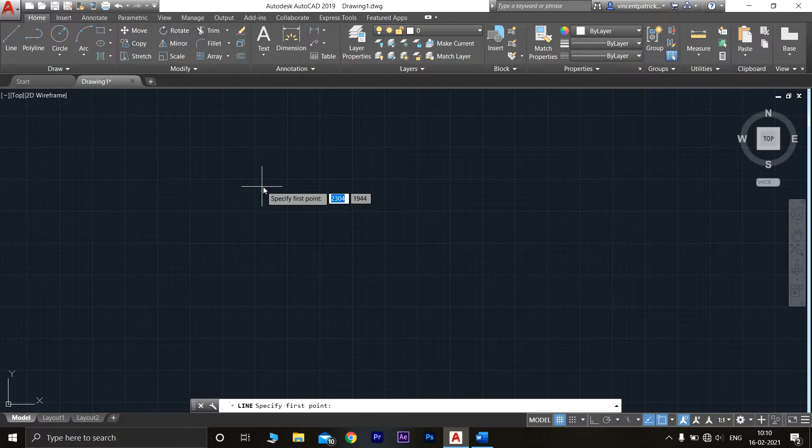Now first let's draw the front view. The front view will be from A to B and C. This section will be the front view, so let's draw it. Go to line, length of 40. So 40. And next this is also 40, so again draw one line for 40.

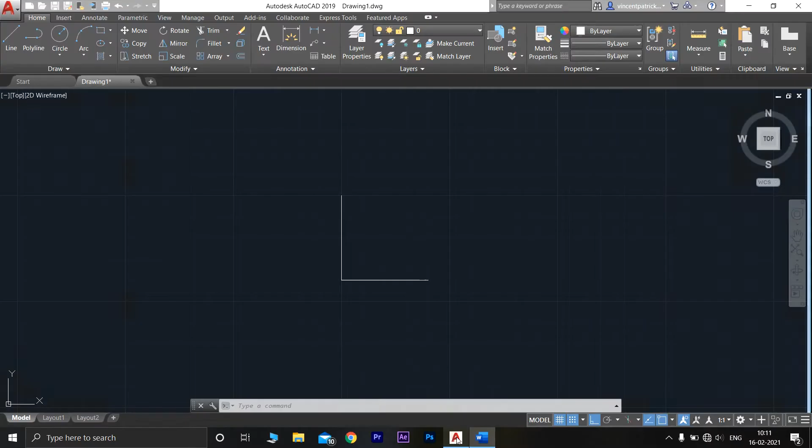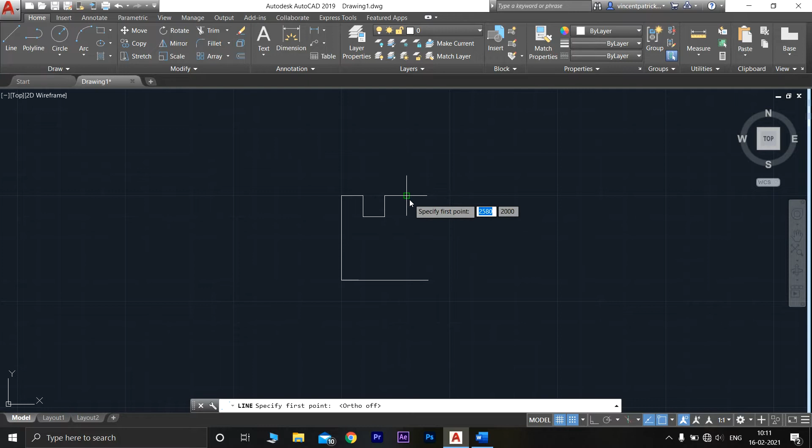Now we have to draw this line for 10 mm. Again this is also 10, 10, 10. From here draw a line for 10 mm and 10. Again 10. Now what you have to do is draw this line, so go to line, from here connect this. So this will be our front view.

Now we have to draw the top view. Top view is when you see this object from the top, this rectangle will be seen, and this rectangle, and this rectangle, and this part will be seen. So there will be totally 4 rectangles.

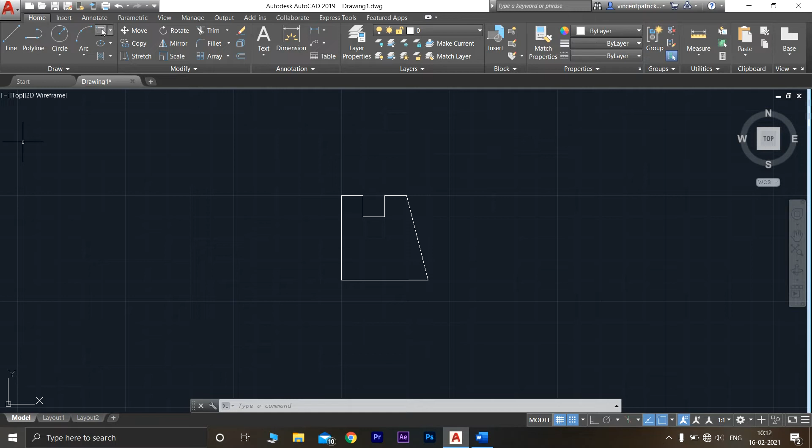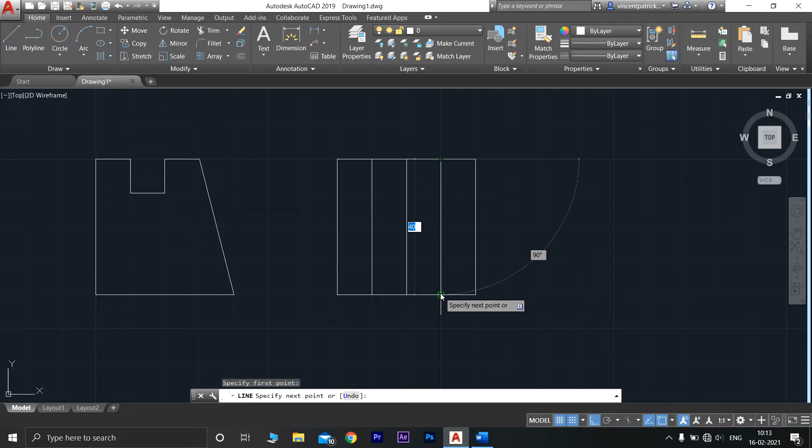From here draw a length of 40. So totally 4 rectangles of 10 mm length. When you see this from top, it will be seen like a square of 4 rectangles. So 1, this part 2, and this one 3, and this one 4. So 4 rectangles.

Now next we have to draw the side views. When you see it from the right side, it will be seen like a square, and even if you see it from the left hand side, it will be seen like a square only.

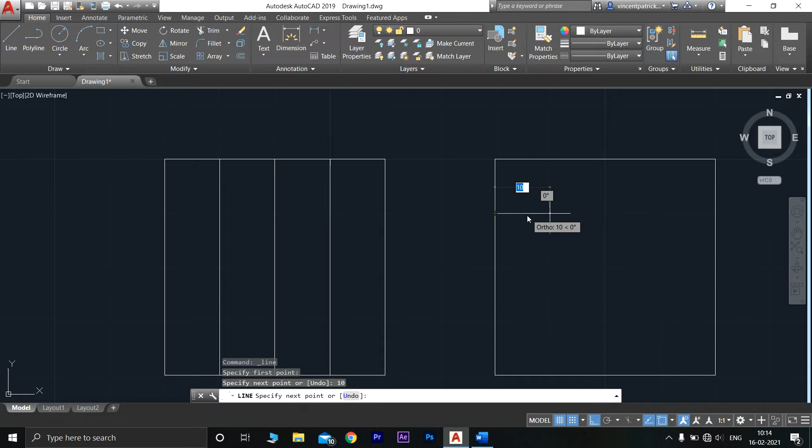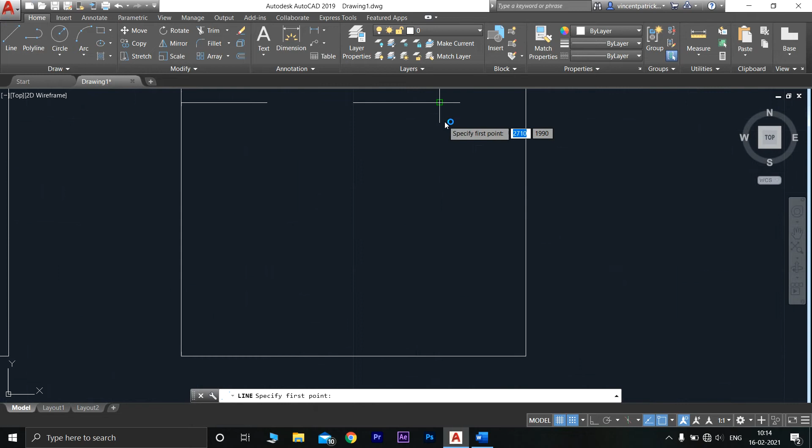So you have to draw one. This line represents the inner hidden surface. So the right side view and the left side view will be same in this object.

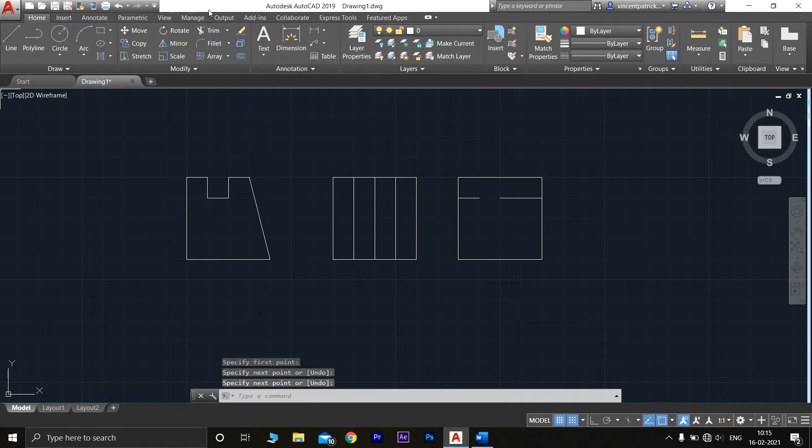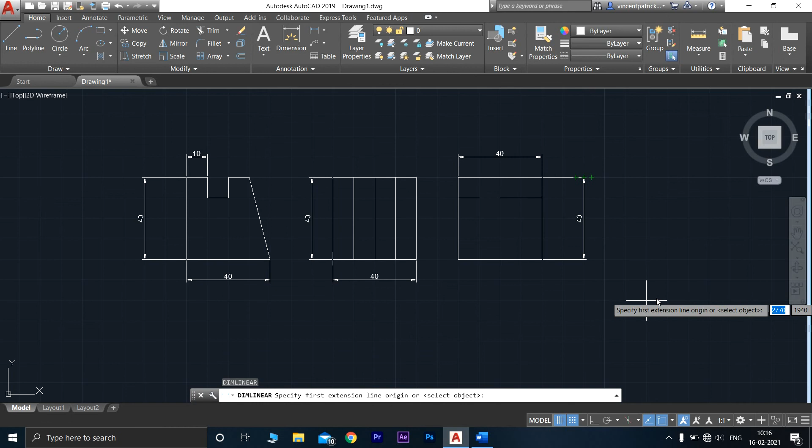Now we have to give the dimensions. That's how you give the dimension, and this will be the right hand side and left hand side view, this will be the top view, and this will be the front side view.

And that's how you draw the different views of an object. It is also known as orthographic view.